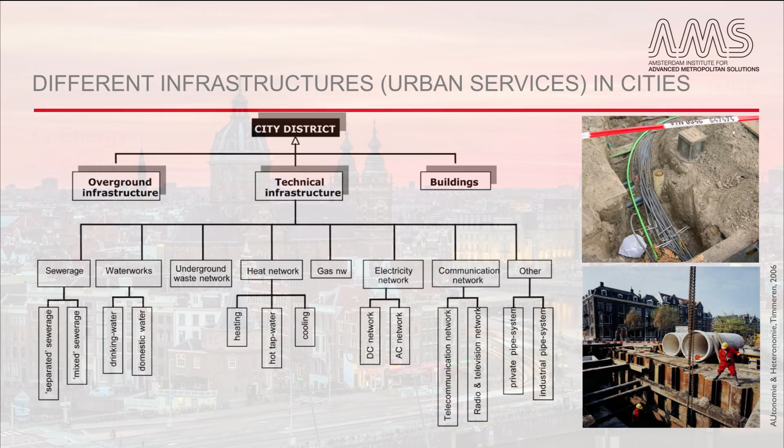As you see, the technical infrastructure includes many different fields. For this introduction to the theme of urban services and infrastructure, we will stick to the three main flows related to the physical or technical infrastructure, which are energy, water and waste.

The energy infrastructure in general is subdivided into electricity, gas, direct energy carriers like liquid fuels, and indirect energy carriers like hot water or in some cases cold water for cooling.

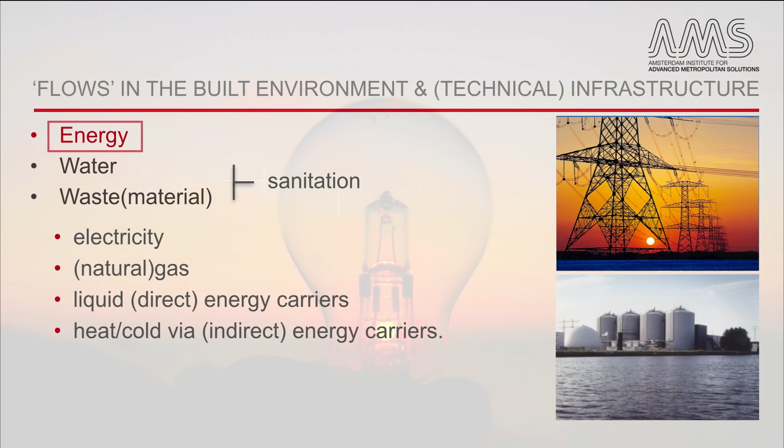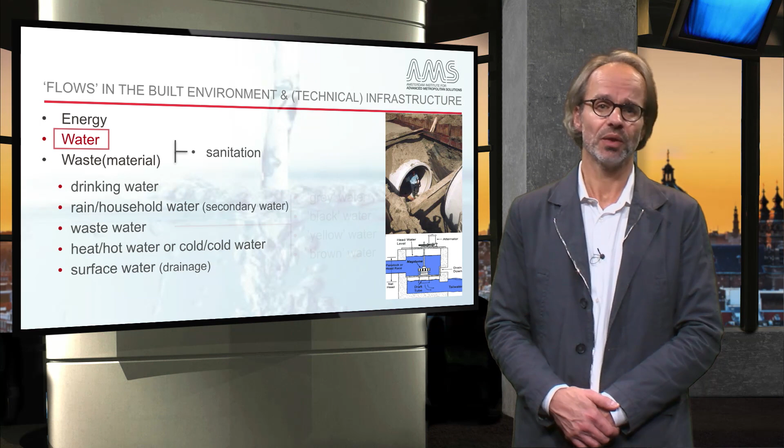The water-related infrastructure concerns supply-related water flows like drinking water and secondary water, but also wastewater. Waste and wastewater are often referred to as the sanitation infrastructure, as they are literally connected to the healthy living environment.

Wastewater is often subdivided according to different qualities or separated wastewater streams. It can be grey water, which concerns all wastewater except toilet wastewater, black water, which is the toilet wastewater, while yellow and brown water concern separated urine and feces flows.

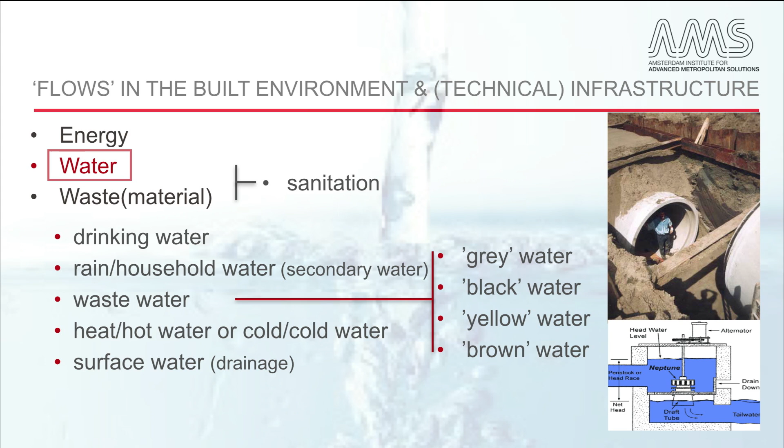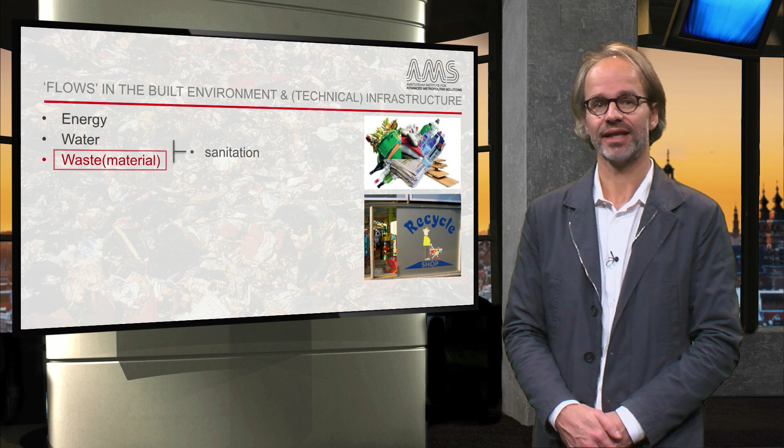But here also hot water and surface water flows are included as part of the water infrastructure. The third group, waste infrastructure, includes different solid waste fractions, often subdivided into organic and inorganic waste flows, but also into mixed or grey waste and residential versus industrial waste.

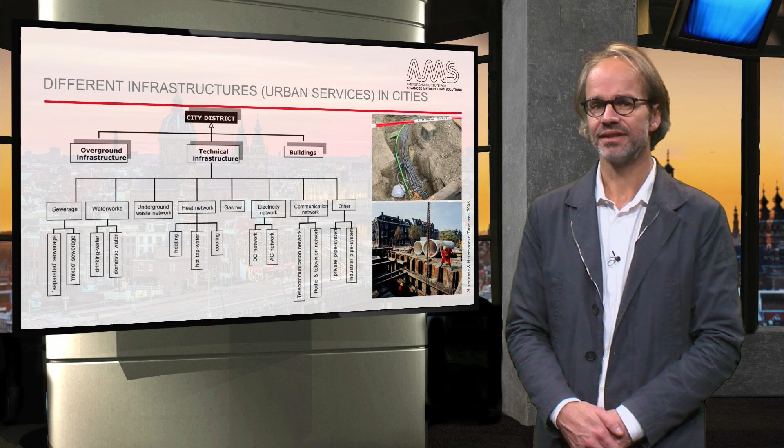One of the challenges of metropolitan areas nowadays is that these different technical infrastructures are often interrelated or even connected with one another. Also, due to the before explained subdivision for different qualities of energy, water and waste flows, this infrastructure gets more complex near to users and their connections.

This makes it become more important by the day to be aware of these interrelations. José Ortega y Gasset stated that for that reason, to be an engineer is not enough to be an engineer.

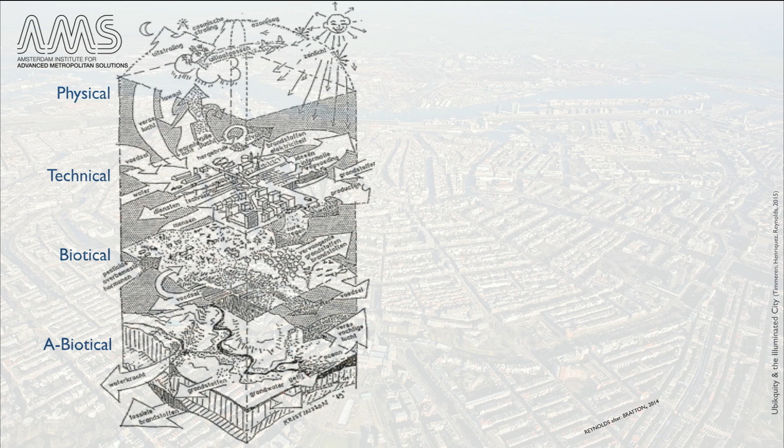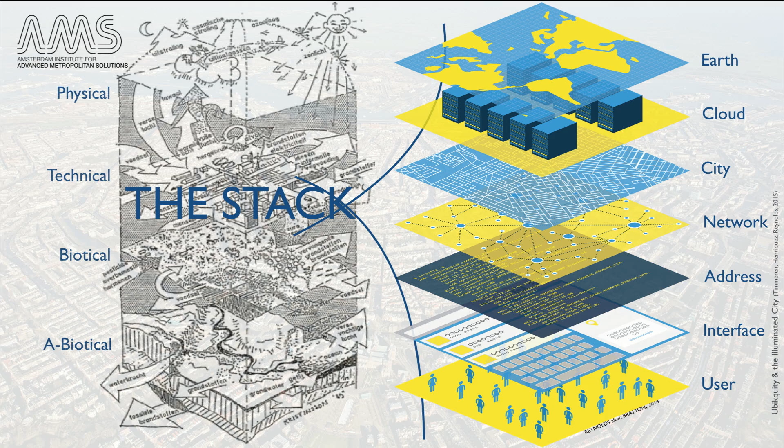Due to ICT, this layered setup is no longer, by definition, location fixed or vertically aligned, as shows Benjamin Bratton's subdivision of ICT-related infrastructures within this technical layer, which he calls the stack. This stack implies that nowadays it is no longer a strict rule that a person is literally connected by an infrastructure to his or her direct neighbor.

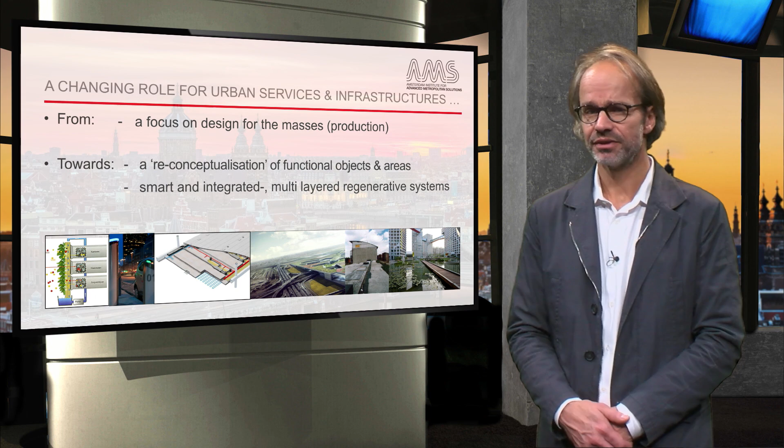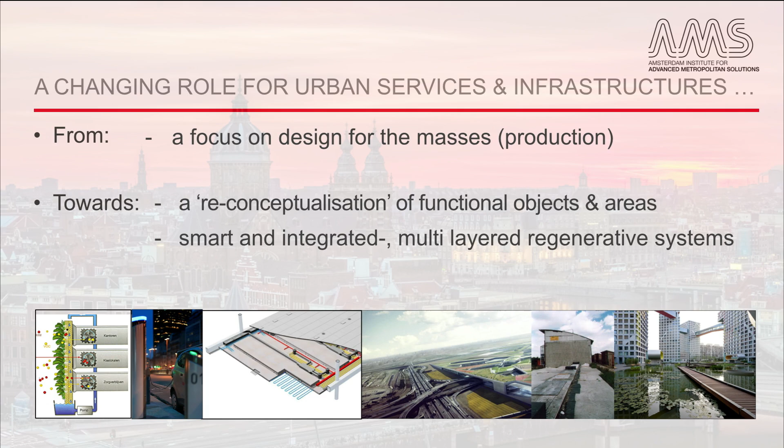These developments regarding urban services and infrastructures support the shift from a focus on the masses and supply of fundamental services towards new forms of personalized supply, integrated and smart, often multi-layered and potentially regenerative systems.

Such opportunities for metropolitan solutions at different scales and regarding different infrastructures or combinations of them, like here the example of a solar bike road in the Netherlands, will be the subject of the coming weeks regarding this theme.